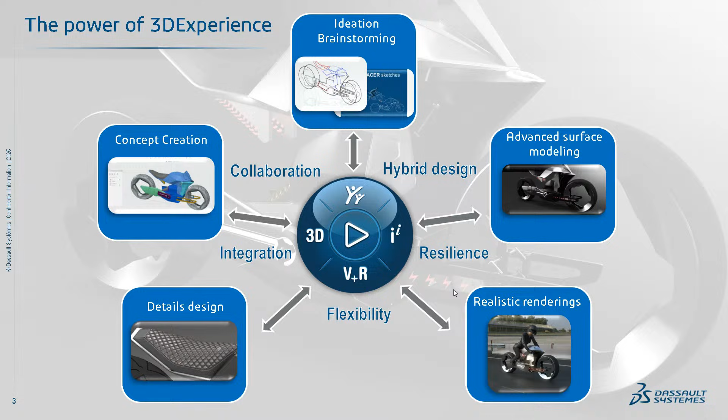We decided to use 3D as a common language from the ideation phase. We started from the sketch and created curves and geometry in 3D, which became the starting point and reference for everybody on the project to work on. From this phase, every other step was parallelized—concept creation, advanced surface modeling, detailed design—all made at the same time using the 3D as reference, working in a single data model for everybody to collaborate, see, and use the different parts.

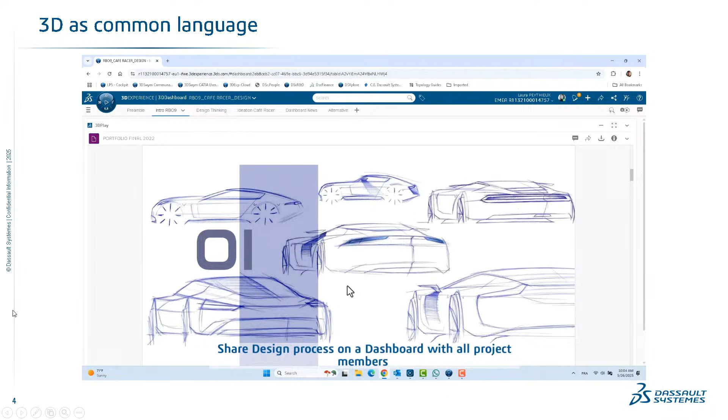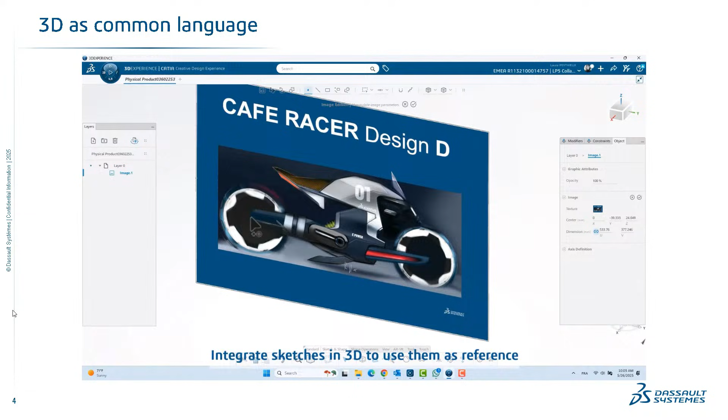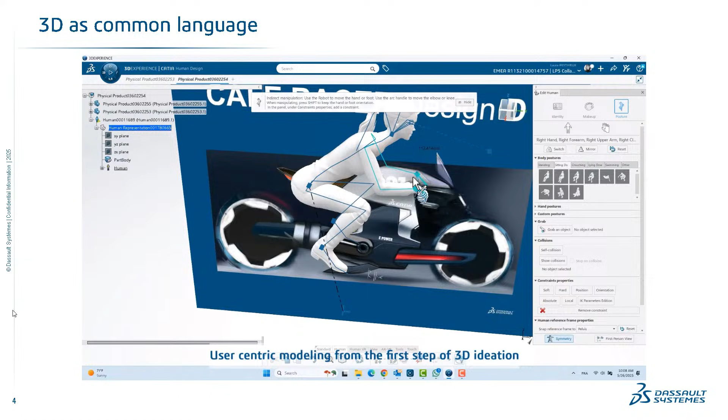So let's start at the beginning of the project. Raffaello started in the 3DEXPERIENCE platform from the start, in a dashboard, gathering all the design thinking and design process that everybody in the project could see. Then we go directly into 3D, importing his sketch, doing the scaling to get the good proportions from the start, and even adding a human for basic proportion and ergonomics, to start with the right shapes from the very early stage.

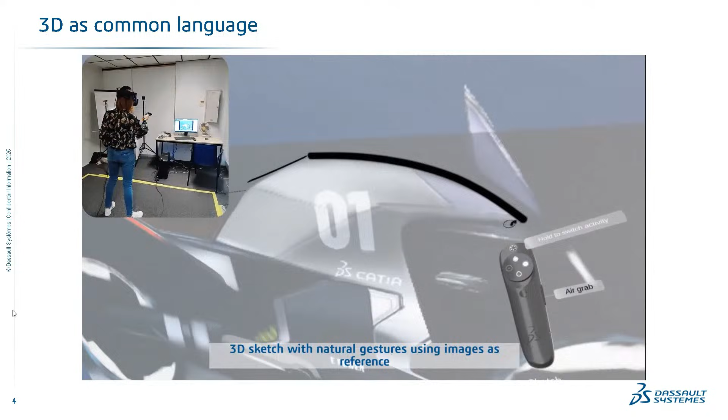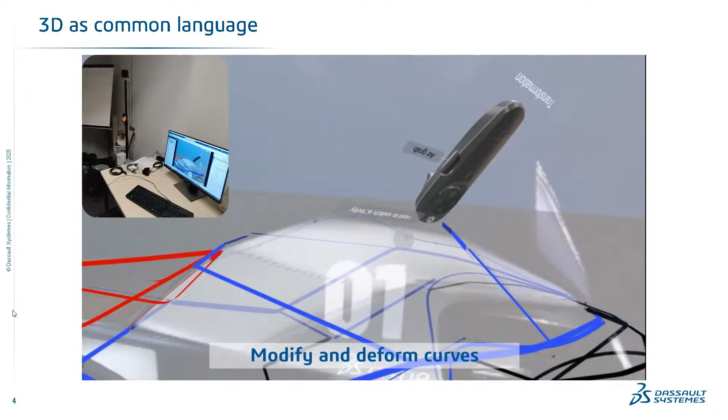Then we can start making 3D. You can work in VR, like I just did with one click to go from VR to desktop and back. You can create 3D curves and modify those curves, either in desktop mode or VR mode—it's completely seamless. So these are the curves.

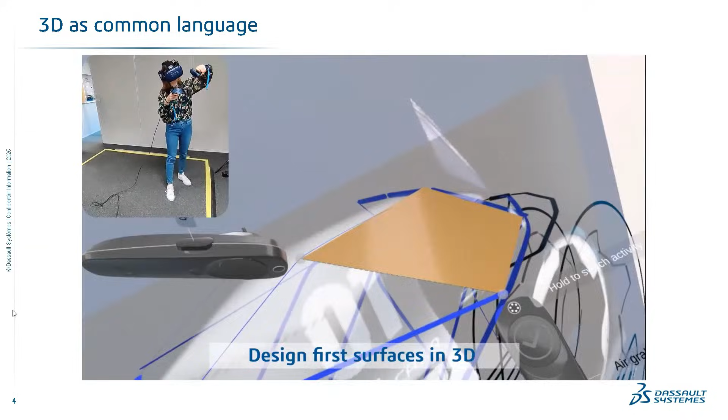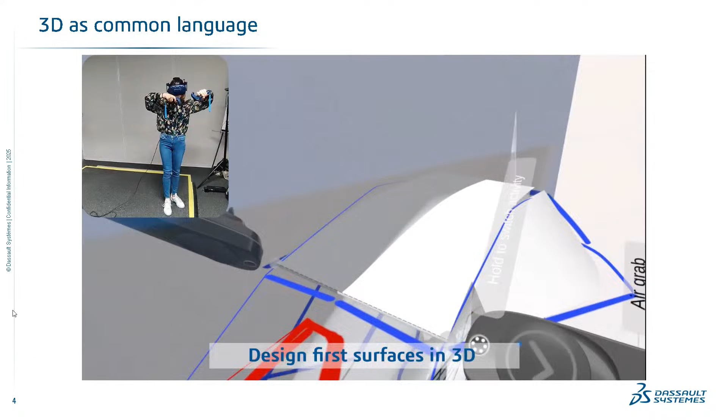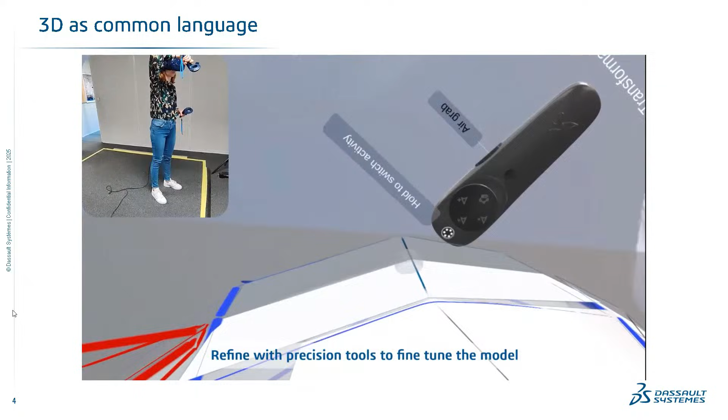You can also create surfaces in VR, which is really nice because you can use your body to shape the main surfaces. The idea is to make the reference surface that will drive the precise modeling afterwards. In VR or desktop mode, you can retrieve precision tools and subdivision tools that allow you to be more precise and fine-tune the model. The tools are the same in desktop or VR; the only difference is the interface, depending on the device you're using. But the idea is the same: adding attraction, moving points, etc.

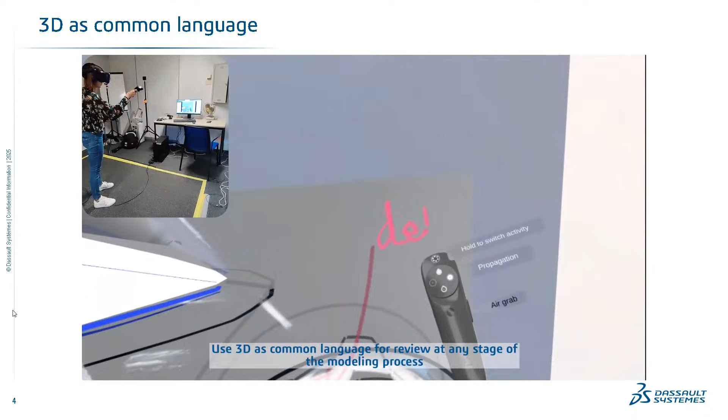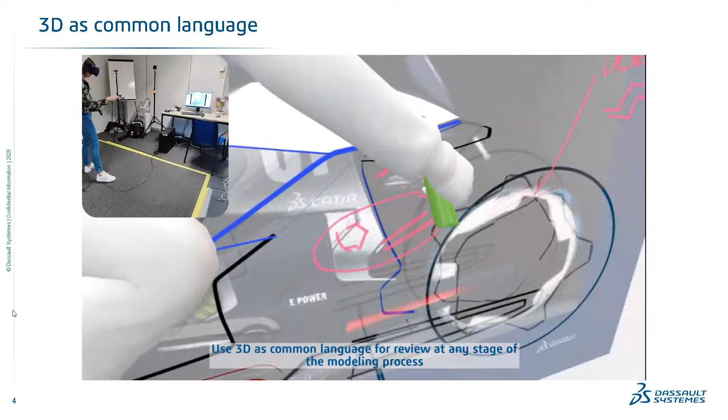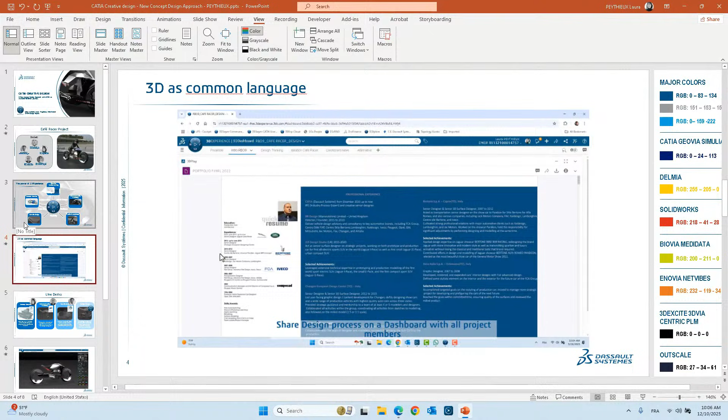Designing in context allows you to create basic volumes adapted for a user-centric approach. VR can also help with review, adding annotations at any stage of the process with the whole team, to annotate, work, review, and make modifications in real time. VR is really how 3D becomes the common language for everyone. So this was the start of the project.

From this stage, after that, everything is parallelized. Concept creation, advanced surface modeling, and detailed design are really done at the same time in three different locations. The idea is really to mix the technologies together, putting the right technology at the right place.

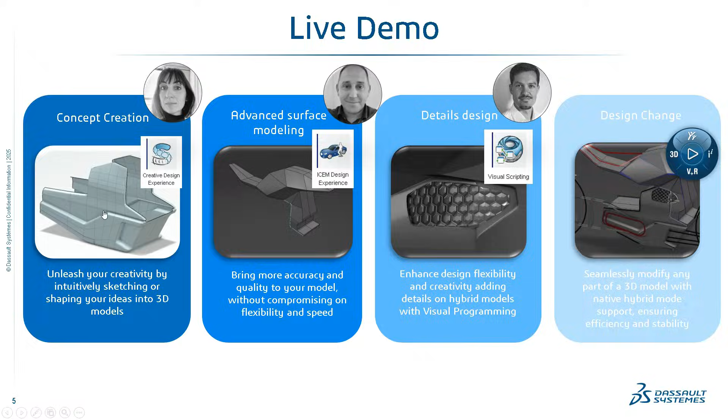I will focus first on concept creation using our latest application, Creative Design Experience, our subdivision modeling application.

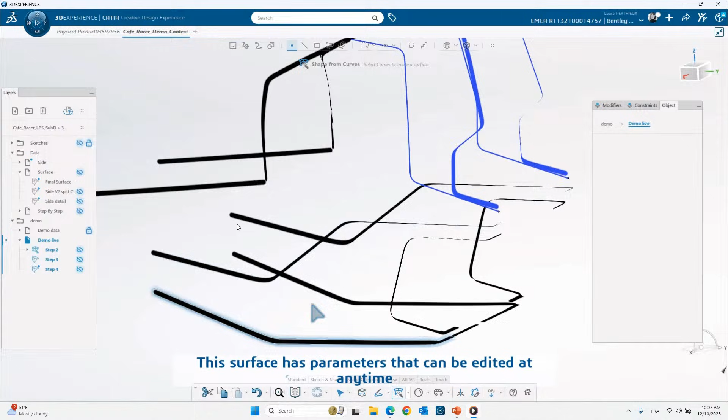So we start with the 3D curve network or the surfaces that I've created, to be sure that I respect the designer intent. Then we focus on the black part to create really quickly a surface that matches the idea. In this application, you can take a curve and in one click create surfaces out of curves. You can change parameters, configure any object at any time.

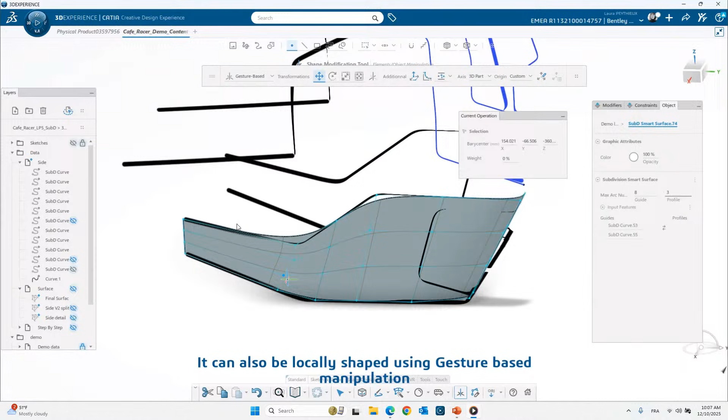The idea is really to be flexible and efficient. You can move the points, sculpt like in a classical subdivision world, but with natural gesture-based manipulation that allows you to move points easily. You can combine that with precision tools for snapping points and moving into local mesh lines, combining everything at once to be really free in your sculpting.

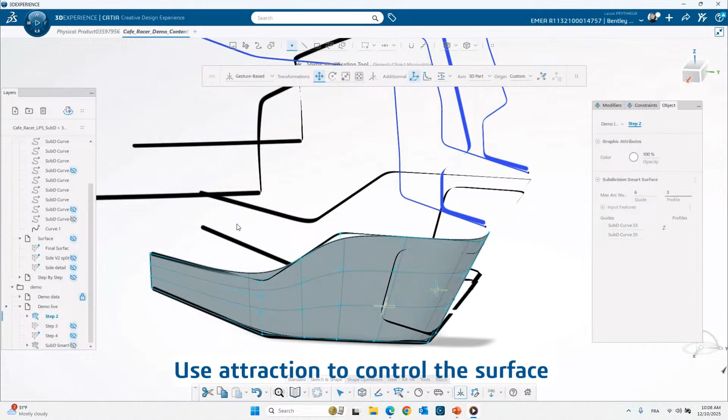You can retrieve all the classical tools of subdivision software, like adding attraction to control the surface and pinch it precisely where you need to, like that.

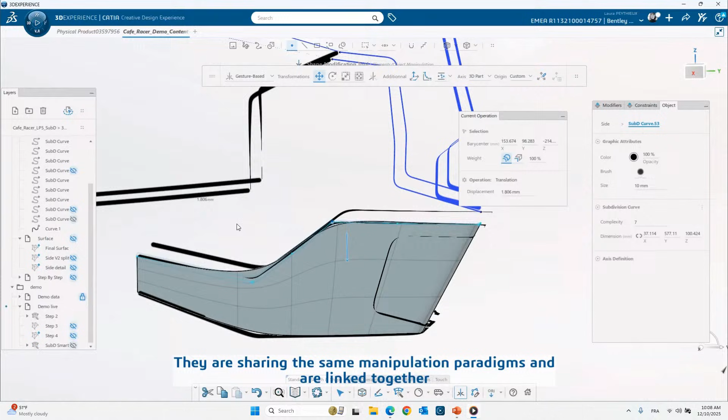One interesting thing in this application is the link between curve and surface. You can modify curves and surfaces the same way with natural gesture, and more than that, there's a link between the input curves and the surface. I'm moving the curve, deforming it, and it impacts the surface I just created from those curves.

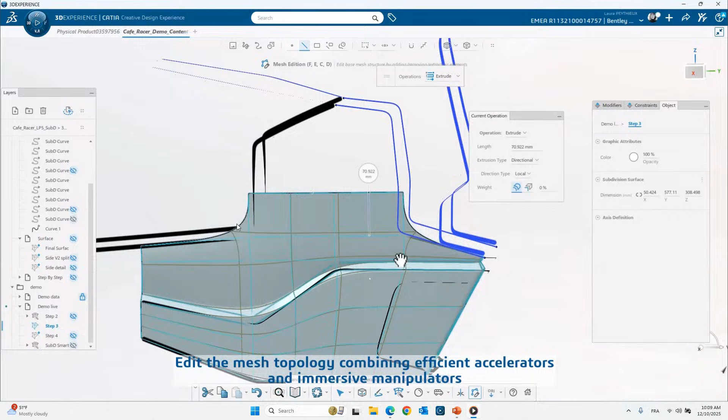We've seen how to sculpt a surface. Of course you can edit the mesh, adding faces, edges, and so on to make it grow. You can switch between mesh edition and sculpting with powerful and productive accelerators and immersive manipulators. The idea is really to stay focused on the shape and not on the interface anymore.

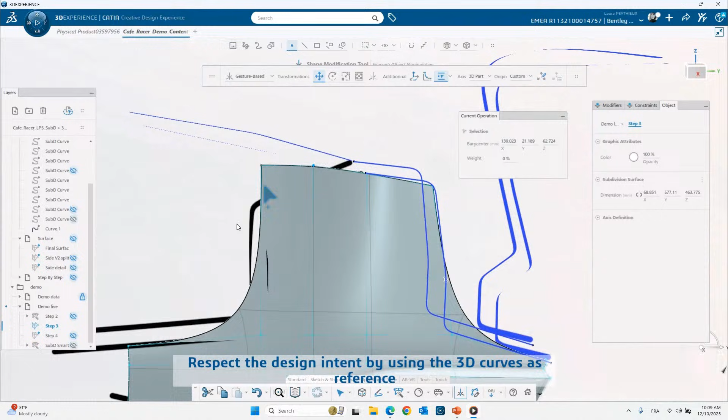The curves here were used as input for the first part. They can also be used as reference to project points on, to be sure at each step that we respect the designer intent represented by those curves.

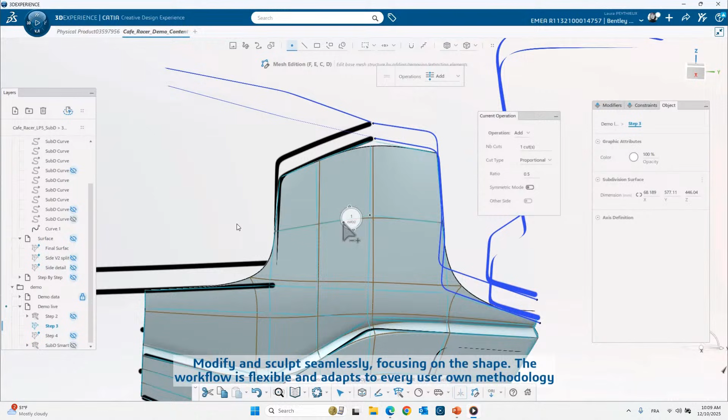Mixing those tools together—sculpting, alignment, mesh edition, etc.—with productive accelerators, you can really easily shape the surface you need. The idea is to stay flexible and allow any user to find his own way of working.

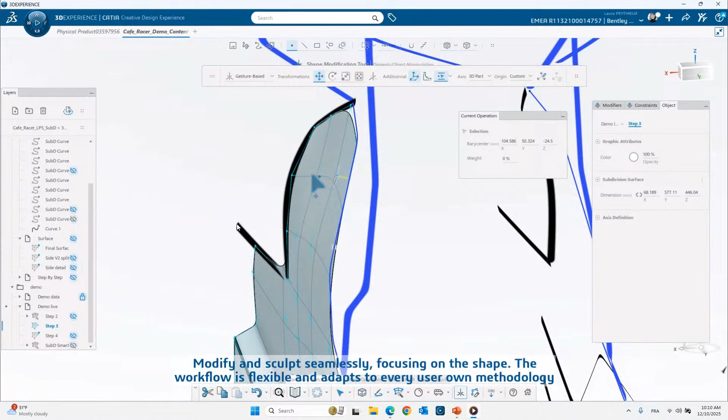We don't want to impose a way of working, but we give all the tools anybody could use in his own modeling way. So here you see it's really easy and really focused on the shape to sculpt.

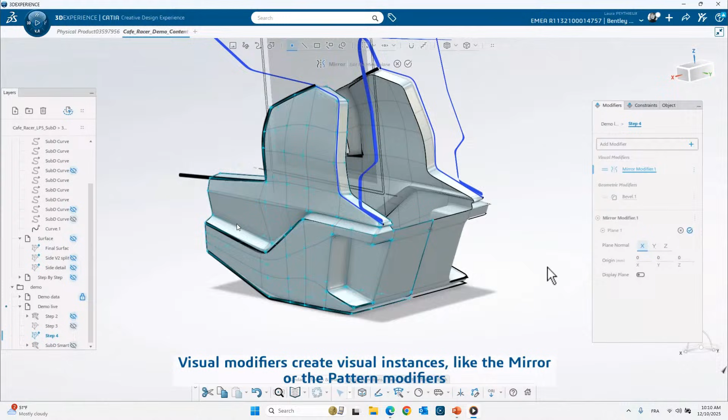On objects in Creative Design Experience, you can add behaviors, which we call modifiers, to add details and complexity to an object. You have different kinds of modifiers. There's the visual modifier that allows you, with very good performance, to duplicate an object, like with a pattern or with a symmetry. It's only visual—just visual.

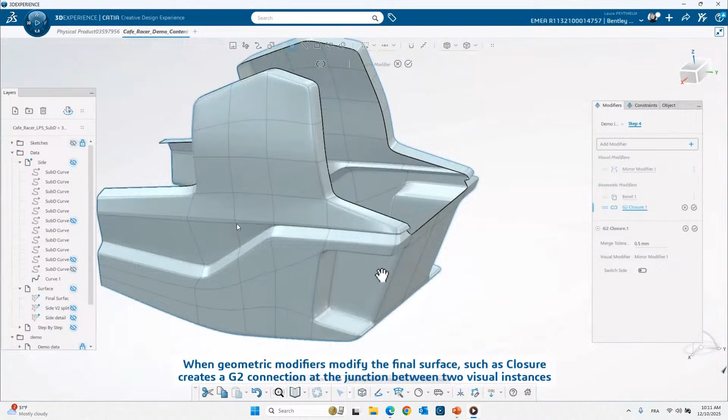But we also have geometric modifiers, and these will impact the final surface. Here you see that a G2 connection was computed at the symmetry plane—it's not visual anymore, it's really creating geometry. You'll understand better with another geometric modifier, the bevel, that will allow you to enrich a mesh line to create junction gaps on the mesh line.

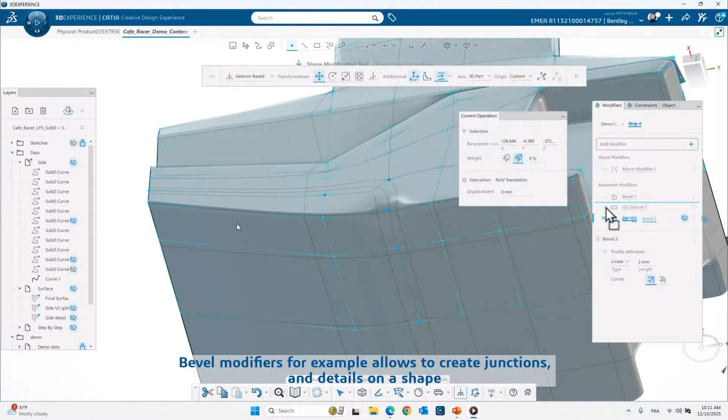So this modifier is created here. You see that in the gray lines, the mesh was detailed. You can modify at any time the parameters and the profile of the bevel, so you can do very complex things. Here I'm creating a real gap between the two parts.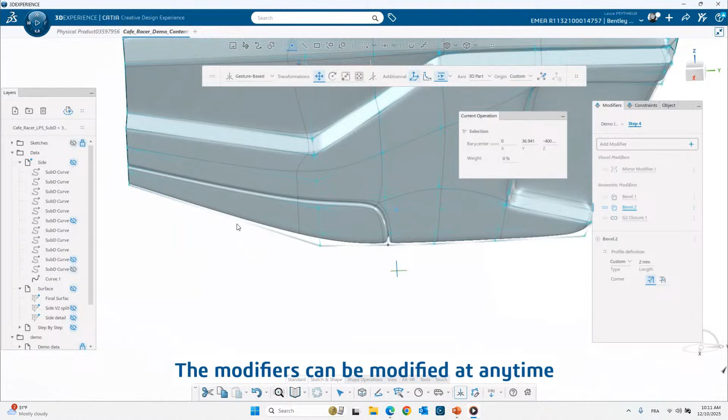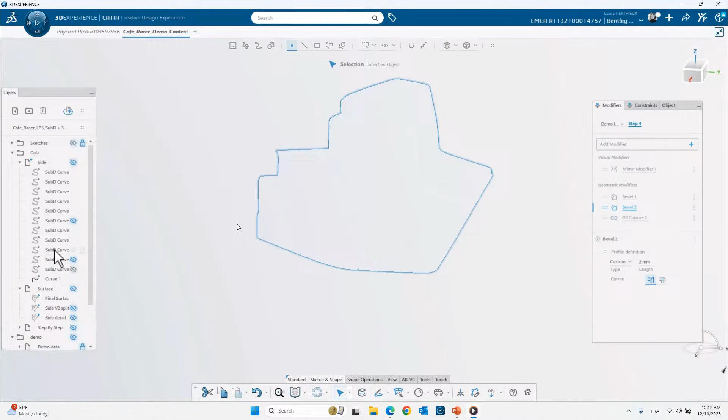What's nice is that even though I added complexity, the shape I'm modifying is still the original one, which means I can still do changes—still sculpt my original global shape, and all the details will be updated afterwards. This allows you to create details at any step of the process, not just at the end, and see the impact of the detail on the shape.

So you see that in minutes, it's possible to create a shape that respects the designer intent and is ready to share with the other project members. So we've seen how I did the part with Subdivision.

At the same time, Julien was working on advanced surface modeling in ICEM Design Experience for making the top part of the motorbike.

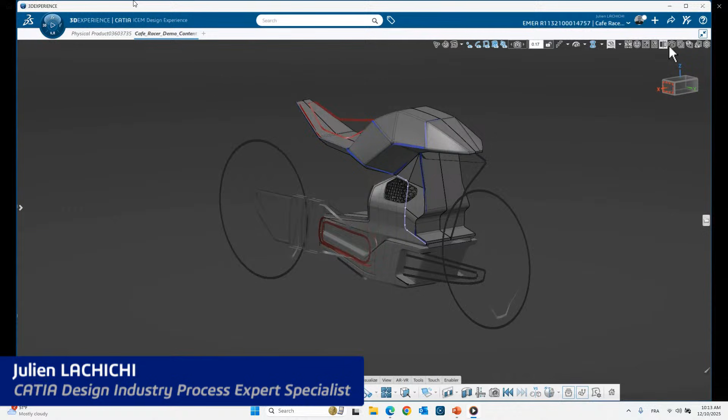So after Laura's presentation, let me introduce ICEM Design Experience, our latest solution on the 3DEXPERIENCE platform. This solution is designed to unify the CAS and Class A modeling communities, bringing both modeling philosophies together in a single environment.

It supports curve and surface-based workflow, works seamlessly with both NURBS and Bezier surfaces, offering soft parametric updates for maximum flexibility and efficiency.

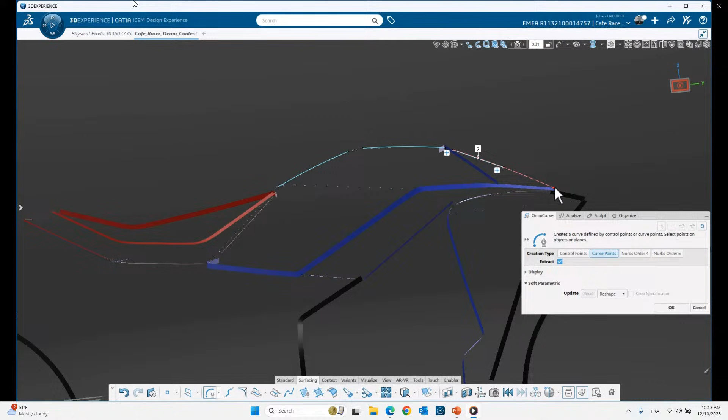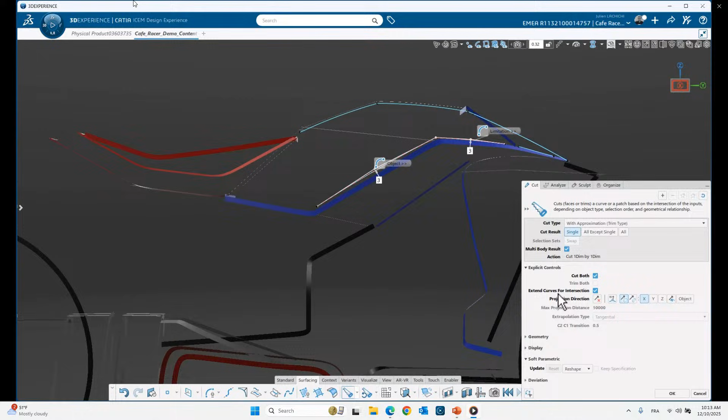As you can see, the user experience has been redesigned completely. Every command is accessible through a mouse menu for faster interaction, with a UI focused on the key needs of surface modelers. We also provide two navigation modes, ICEM Surf Navigation and CATIA Classical Navigation. And of course, being fully integrated in the 3DEXPERIENCE platform, we can load mechanical data and work directly in context.

Let's look at a concrete example, this modeling of a motorcycle tank. We follow the Class A modeling workflow by creating curves on top of 3D sketches. We can import sketches, scans, and other external references.

The objective here is to build a curve network for the tank. I start by drawing and trimming the curves using the mouse menu for all commands. Once the main curves are defined, I switch to the top view to adjust them.

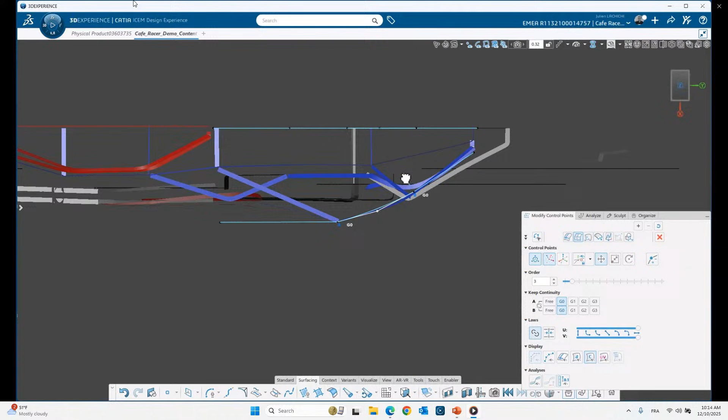Then I create connection constraints to maintain dependencies between my curves. This ensures that the modification remains fast, consistent, and fully reversible.

Next, I mirror the curves to guarantee the continuity across the Y0, and from here I begin to create the surfaces.

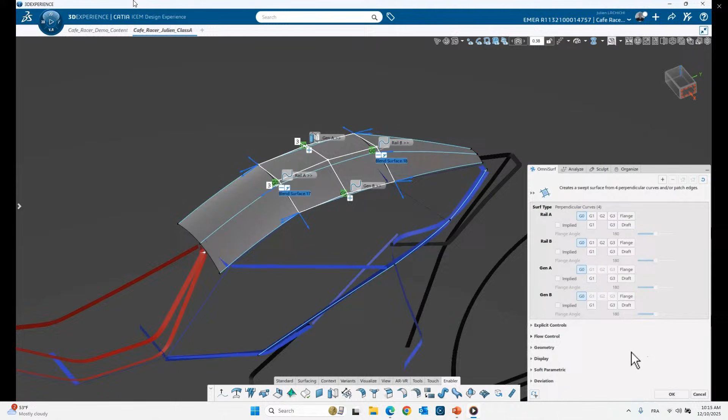For each surface, I can choose whether it should remain dependent on its curve, giving me the flexibility to work either parametrically or explicitly.

Using the OmniSurf, I shape the surface directly, adjusting curvature, refining highlights, and controlling how the surfaces are associated.

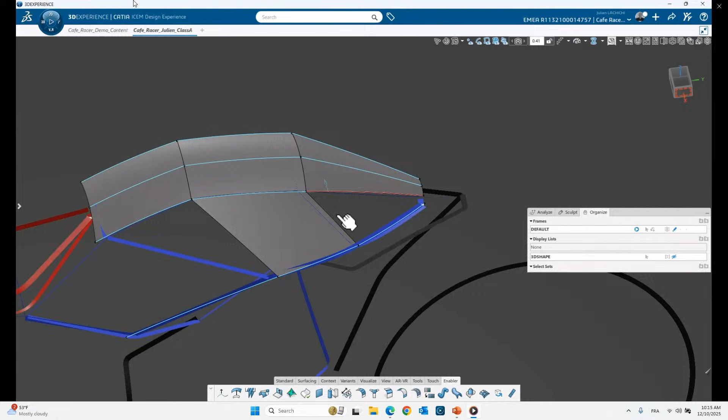I create the tank surface step by step, selecting surface, edge, and curves. Again, all changes remain reversible. At any moment, I can switch geometries between parametric and explicit mode.

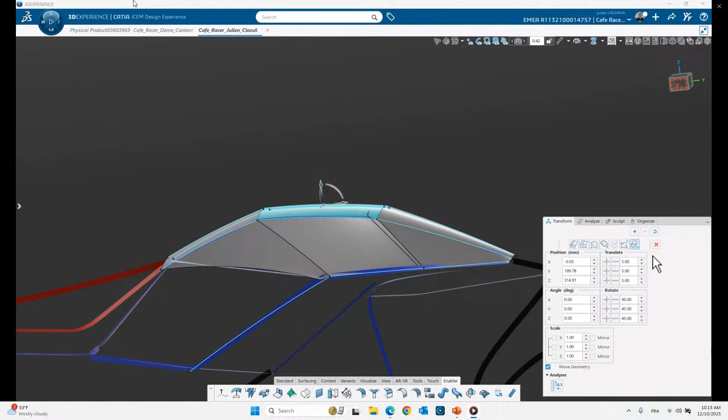This is where we clearly see the advantage of the surface associativity. The system maintains dependency across all modeling steps.

To illustrate this, let's look at the fillets. So I create the fillets one by one using OmniFillet. Here I choose chordal fillet of 10 in curvature.

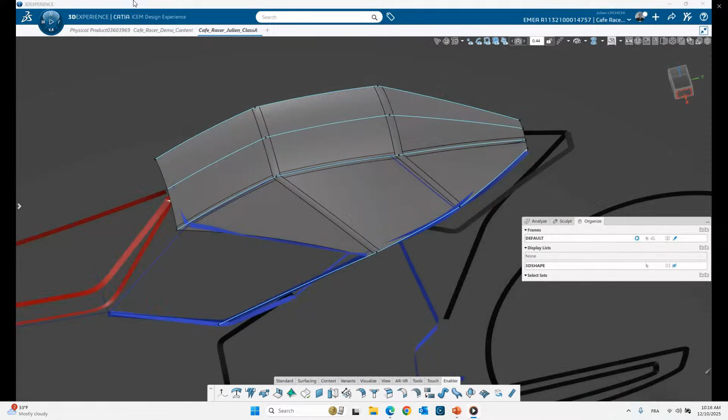But of course, there are other possibilities for the fillets. You can use true radius fillet, variable fillet - everyone are available.

So then I trim the main surface using OmniCut, which combines trim and face capabilities selection compared to ICEM Surf.

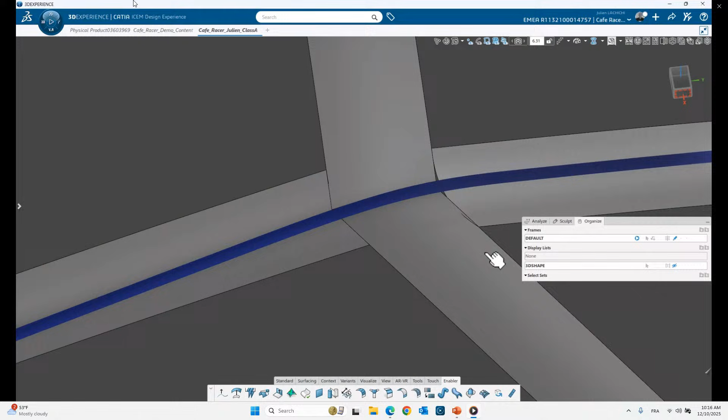For the corners, I draw the blend curves to cut the fillets, and then I use OmniSurf by selecting the 4 surrounding edges to create my corners.

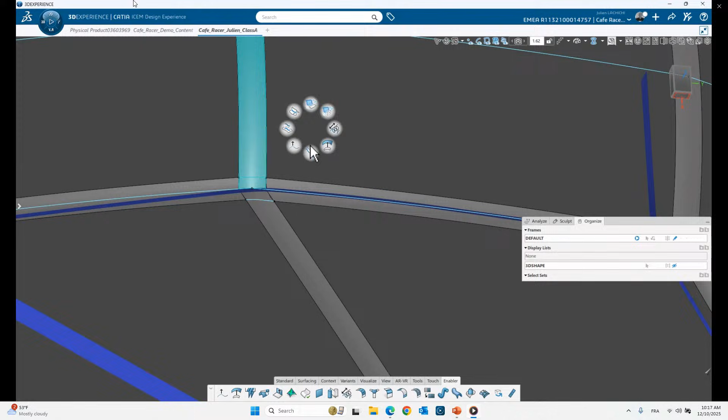Inside the same command, I can directly set the continuity for each edge without having to reconnect them manually. So we can see it after.

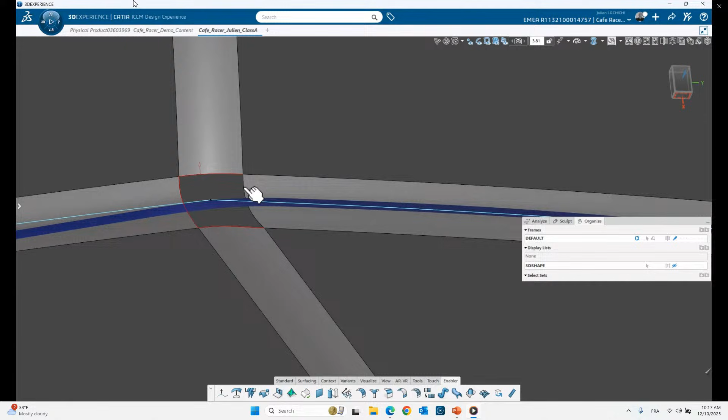So when creating the corners, you can set the continuity for each edge. It's very fast.

Once all the surfaces are assembled, you can see that if I decide to move a surface of the entire model, it can update the model directly thanks to the parametric possibilities.

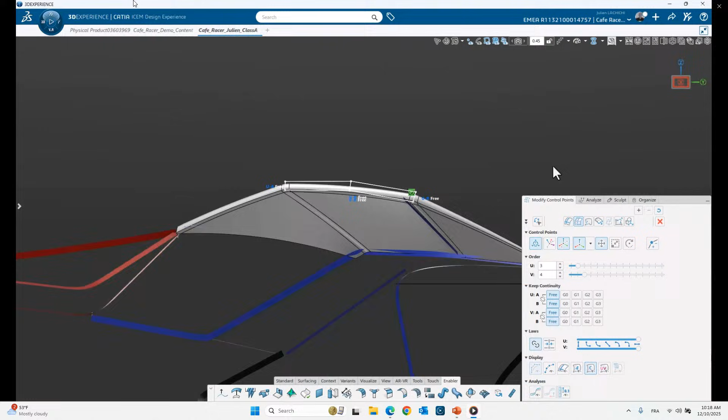In the same way, if I apply the modification to a control point and edit it, I can shape the surface and the rest of the model reacts consistently.

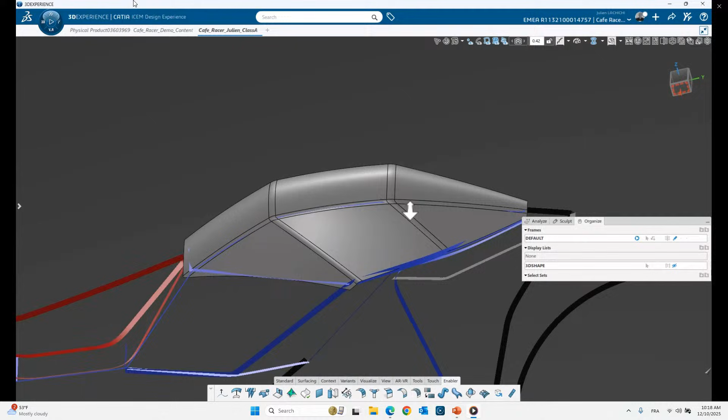Finally, you can see a preview of a complete tank model, a clean, fully associative hybrid Class A surface model that remains easy to modify at any stage. That's all for my part. Thank you for your attention.

Thank you, Julien. So we've seen how I made the body in Subdivision, how Julien used advanced surface modeling for the tank. And now we'll see that Felix, in parallel, could work on the air vent that goes through the two previous surfaces with visual scripting.

Yeah, thank you, Laura. Yes, here you can already see on my screen - so here we have the surface input coming from Laura, the Subdi surface created with Creative Design Experience.

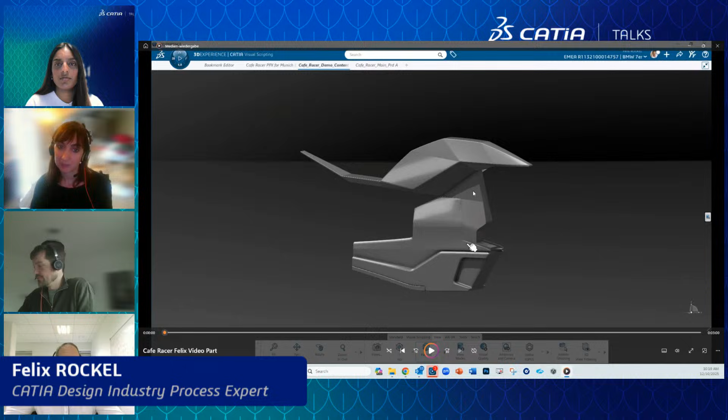And then here we have the Bezier Class A surface from Julien, created with ICEM Design Experience. So two different modeling approaches, but of course all in CATIA. So I can put my detail now with visual scripting right on top of those surfaces within the same assembly.

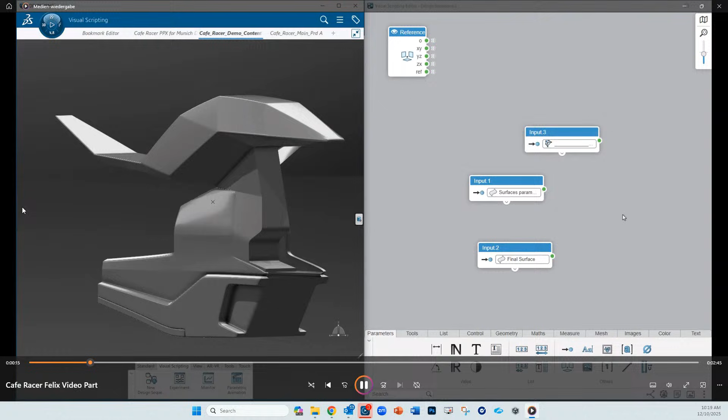Yeah, we're all working in parallel. So I create a design sequence in visual scripting, then I get access to this graph editor that you see on the right, and here I can create my operators, those little nodes that I can connect with each other in order to generate my structure, my algorithm.

So here you see on the left that I use the input operator and get the surfaces from Laura and Julien inside of my graph. And then I can use several nodes in order to create this detailed structure for the air intake.

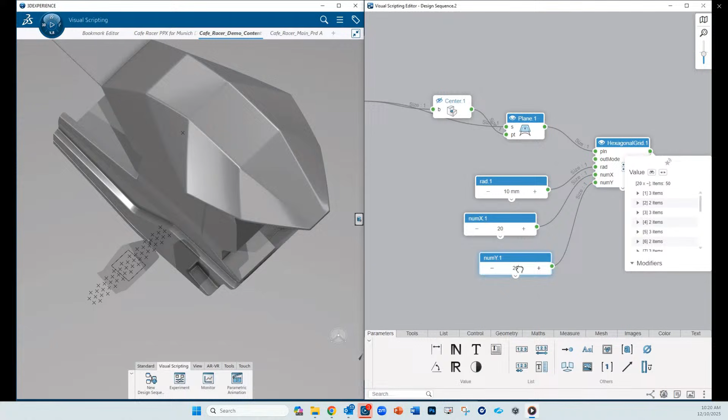The idea was to have a design with lots of little elements that can open and close depending on how much cooling is needed for the engine. So you see me creating this exactly right here.

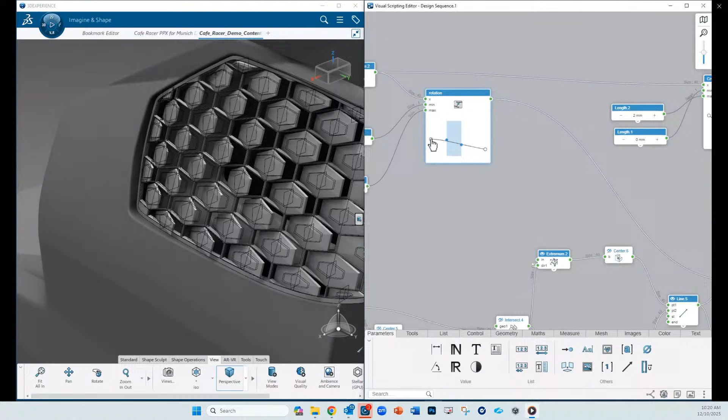I have a hexagonal structure that I project onto the surfaces from Laura and Julien. My entire algorithm is fully parametric, so I can change each and every parameter at any time, trying out different variants with this curve evaluator, for example. I can change the rotation of those little elements, which lets more or less air into the engine.

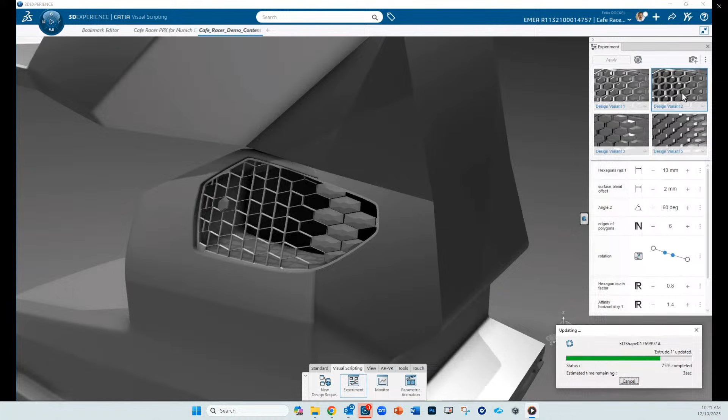In visual scripting there's also an experiments tab where I can access all the parameters you see in the graph, but cleaner and nicer, so I don't need to search in the graph for which parameter is which. I have it all accessible here, and I can create snapshots. You can see those snapshots in the right window on top.

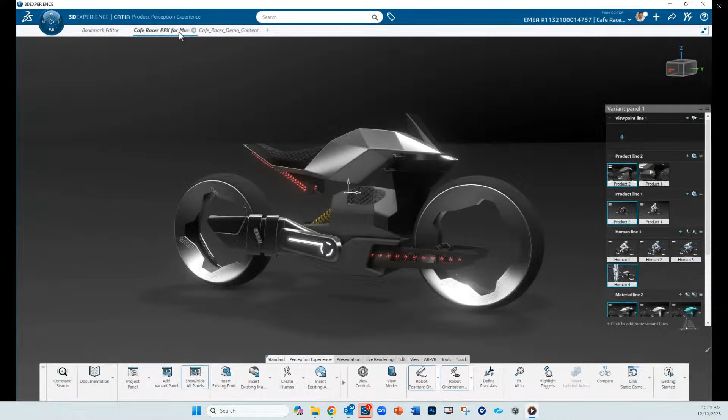Once I decide on a design, I go to Product Perception Experience, our application to create design presentations directly on top of our CATIA assembly. This is the real CATIA data that you see, so I can change it at any time and it will also update in my presentation.

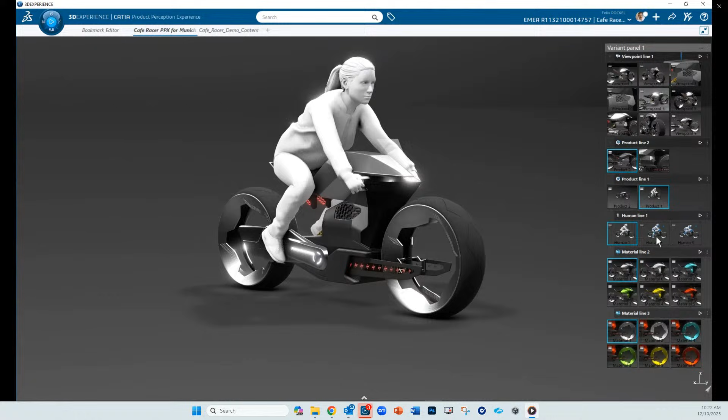I'm reviewing and presenting this idea with the structural element for the air intake. I can put the bike in context with a human driver, switch through different variants, and switch through different colors for the different materials in order to present my bike in this example.

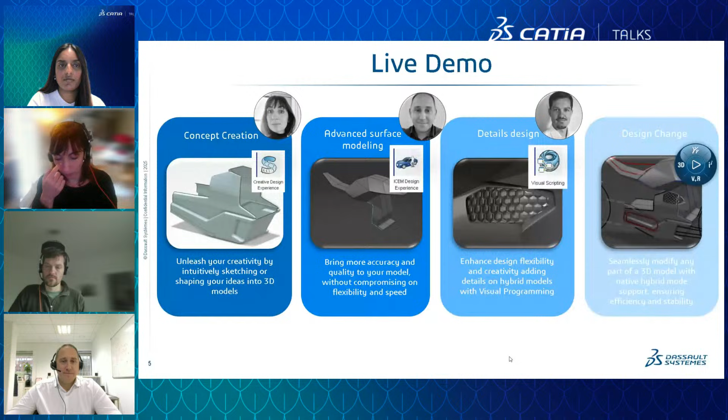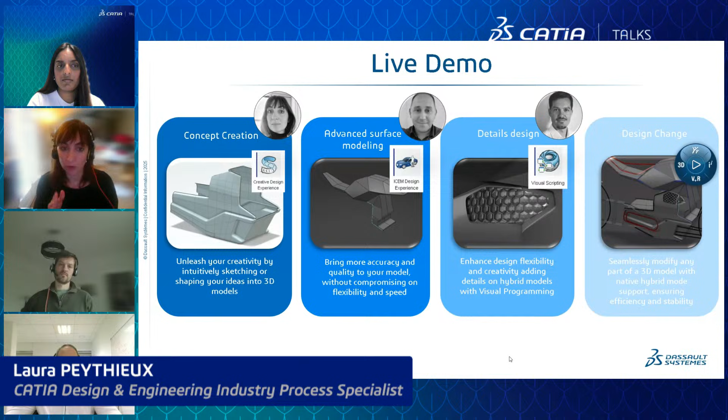At the end of this stage, we have our full concept created with the three of us working collaboratively. We are in the concept phase, so the idea is really to make variants easily, to be creative, to test things, and we can each do our part of the process.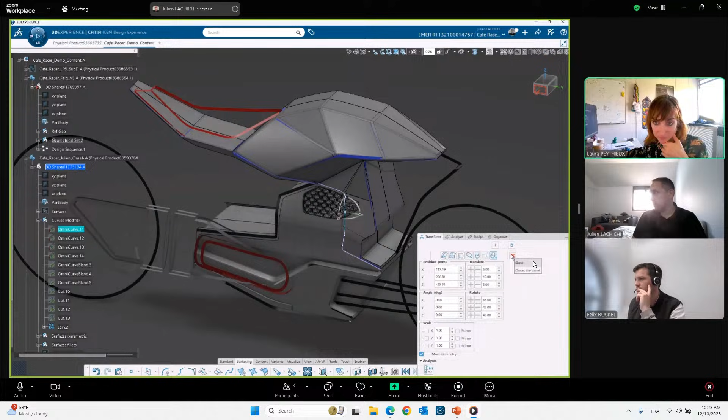But we can also work in a more global way. Since we're based on the same object, we could move globally all those parts at the same time. Here we recorded a call we made together, and Julien is modifying a curve that was used for the creation of our parts.

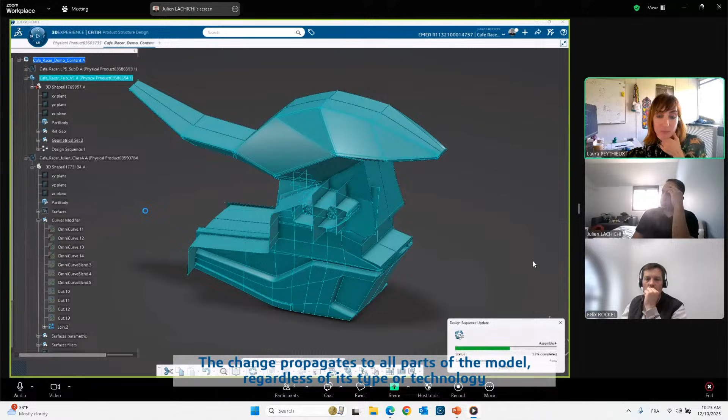Julien is doing the modification and will dispatch it to all the parts, updating everything. All the parts will be updated, Subdi, Bezier, and even the visual scripting on top, as everything is linked together in a hybrid model.

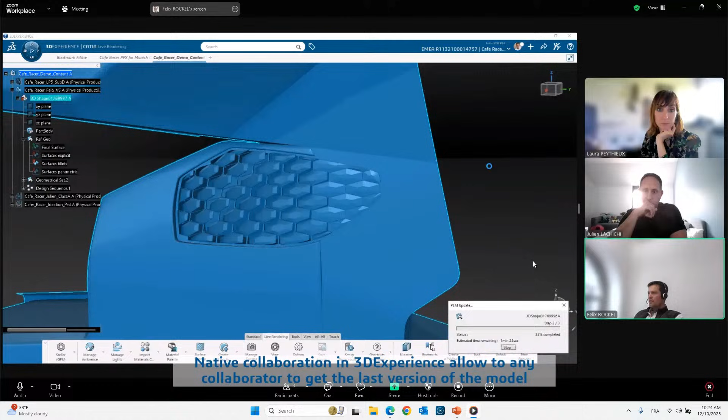Here you see the modification made for all the parts together - it's not accelerated, it's real time. Felix can get into his own session and check if there are updates. If there are, he will update his model to have the latest version in his session.

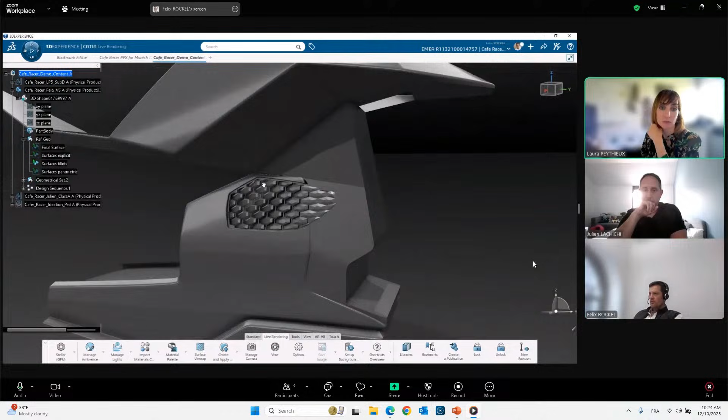Then he'll be able to seamlessly go to Product Perception Experience, the experience he already made, with this new variant, and we can review together this variant, compare it with other versions we already did, and so on. The idea is really to stay flexible, no matter how advanced the model is.

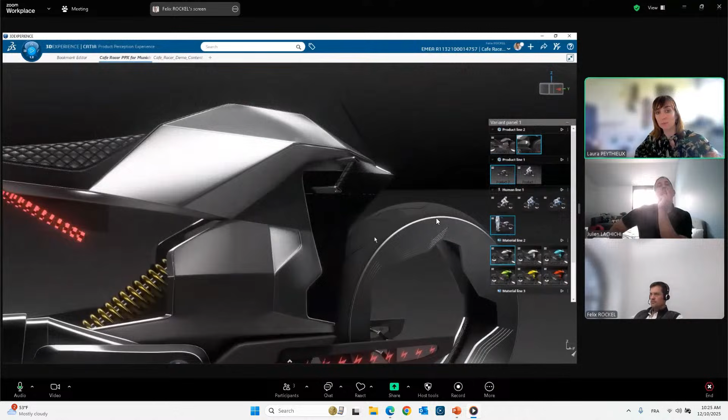So here we're going to Product Perception Experience to see the result, and we can go back and forth between the different versions we already made.

So we've made the tour of our concept modeling process. You've seen how we worked collaboratively across all of Europe together, putting the right expertise and the right technology in the right place. The idea is really to be creative and efficient, and to create variants very easily.

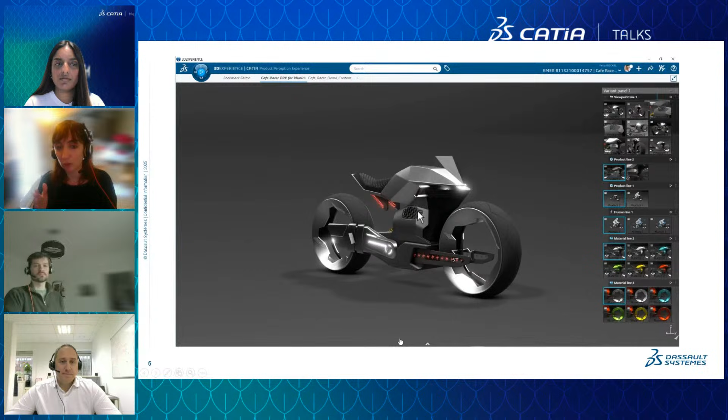Afterwards, when we've selected a variant, we can push it further into the process, going to engineering, manufacturing, because all the surfaces we create, even at the concept phase, are compatible with the rest of the 3DEXPERIENCE platform.